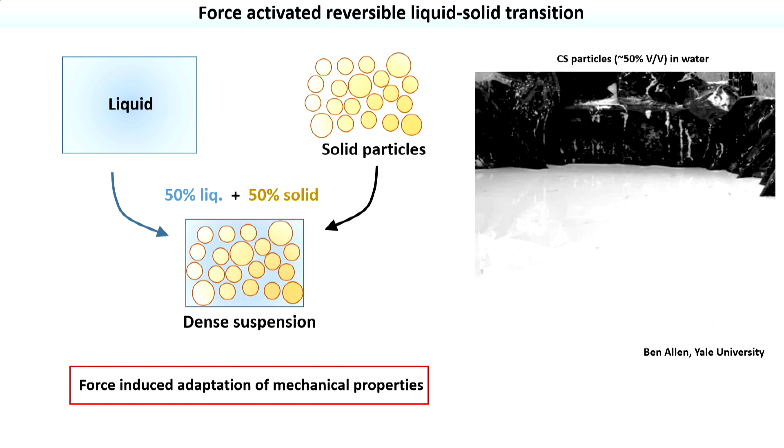Same principle allows one to run across a pool of cornstarch, as you can see in many YouTube videos.

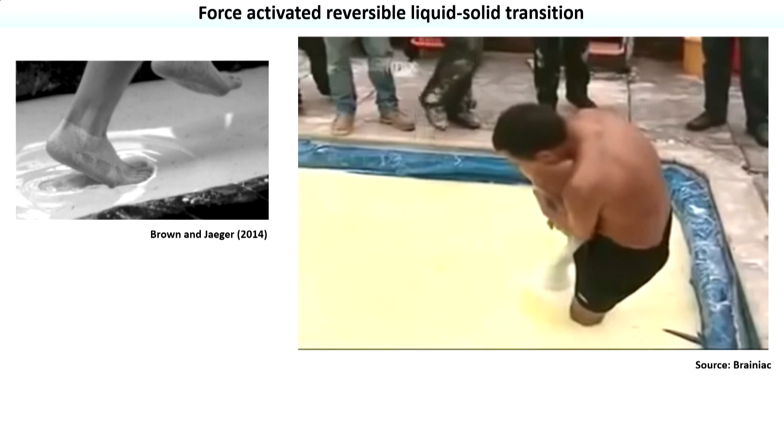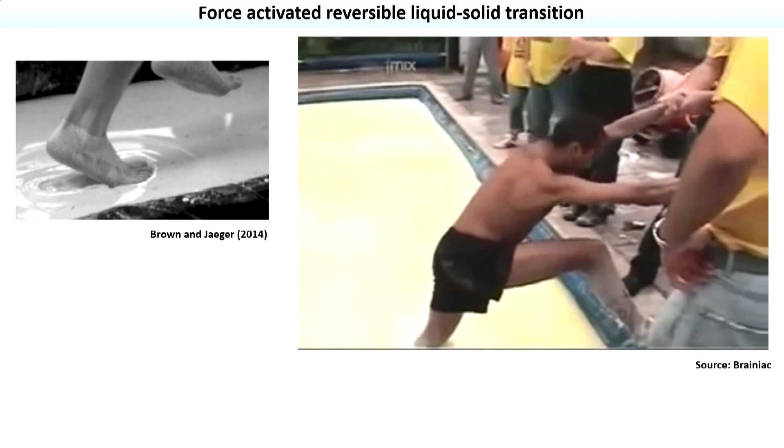This compressive force is not a requirement. At one time people thought it was the compression that solidifies the system. Actually, there is one interesting video where a guy got inside this pool of cornstarch. He has a difficult time getting out, which means it can resist the extensional force as well.

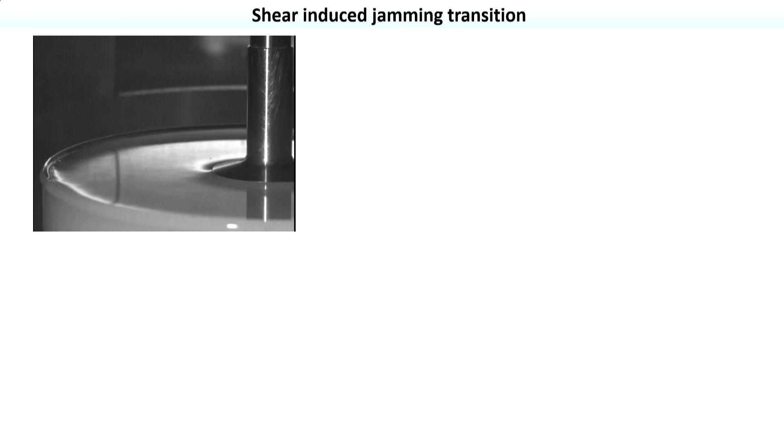So a few years back we studied this problem in a more systematic manner in the lab, like jamming under compression and jamming under extension, and we showed why this is so common and works for any kind of deformation, because this jamming is basically shear induced. As long as you have a velocity gradient inside the system, it can jam, and we demonstrated this more clearly.

You take a glass beaker, you keep a dense suspension, cornstarch and water for example, and you have an inner cylinder that can spin very fast. By spinning the cylinder you can create a velocity gradient without any compression or extension. The shear can actually solidify the system, and if you stop shearing, it goes back to the initial fluid-like state.

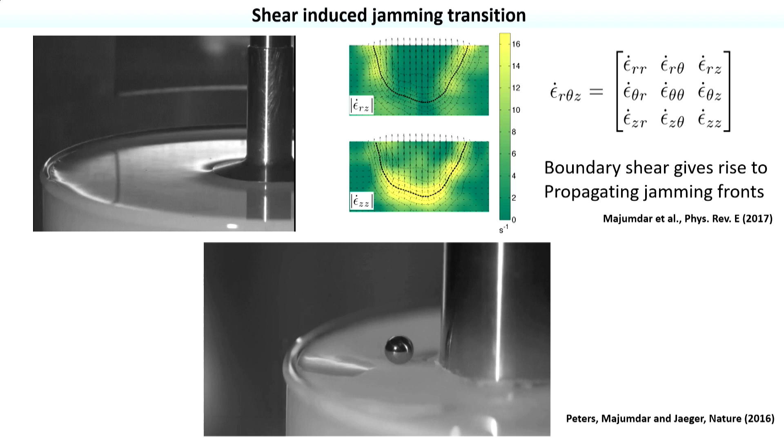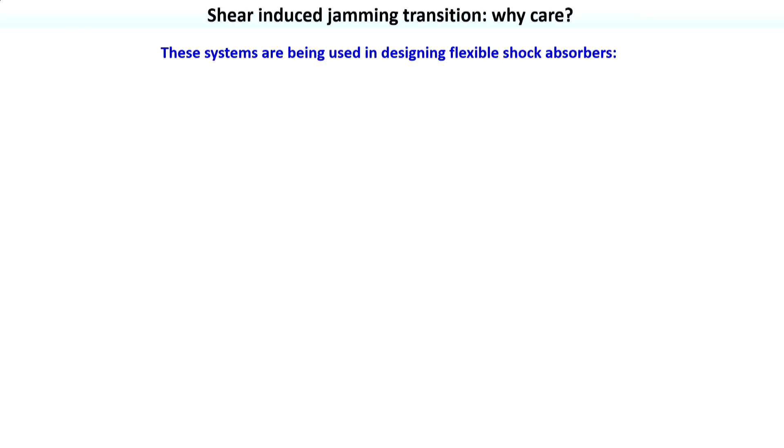Due to this interesting property, these materials are being used in designing flexible shock absorbers. Here are a few examples. You take this Kevlar fabric, which is the material used for making stab and bulletproof vests, and you treat it with dense suspension. It becomes very tough, and it cannot be punctured without compromising the flexibility.

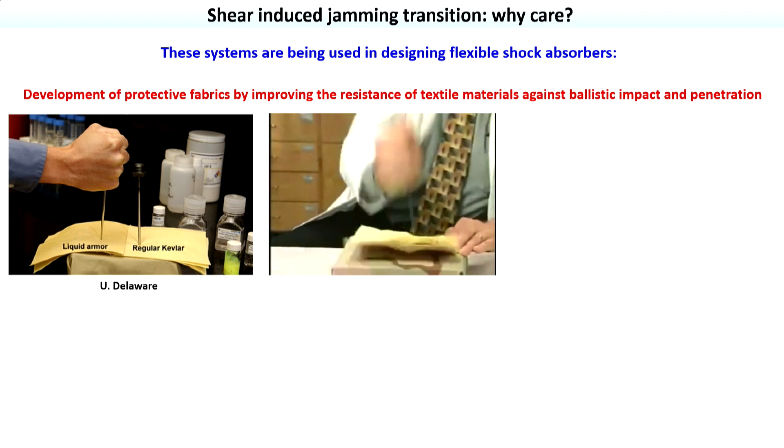That is important, because you can argue why not use a steel plate instead - but it won't be flexible. This can bounce off bullets, and you can also see it deflecting a hunting arrow, which is almost more powerful than a bullet probably.

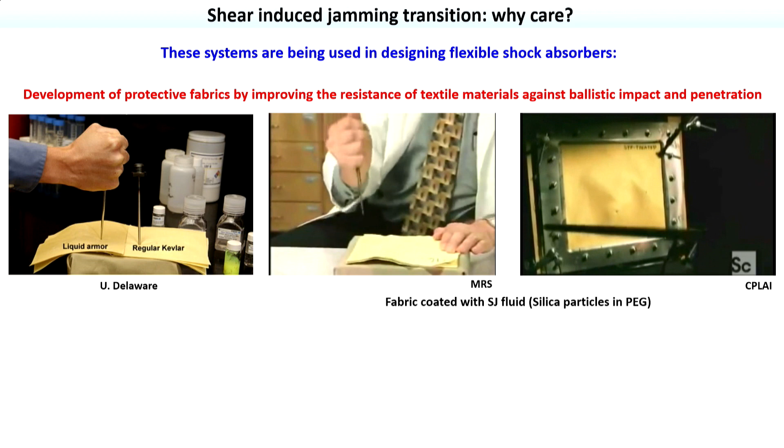There are other potential applications as summarized in this recent review, particularly in the field of designing flexible shock absorbers.

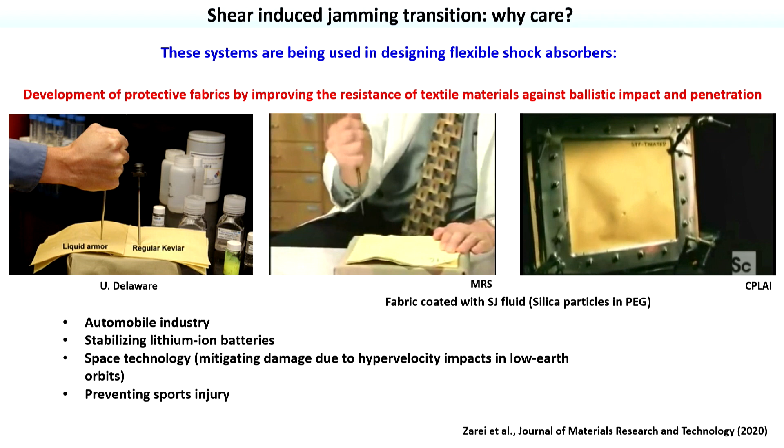So despite this study, there are many open questions. For example, the mechanism for shear-induced jamming is not well understood. Questions like what sets the upper limit of the stress response after perturbation, how quickly one can get to the jammed state, and once the jammed state is formed, how quickly it can relax.

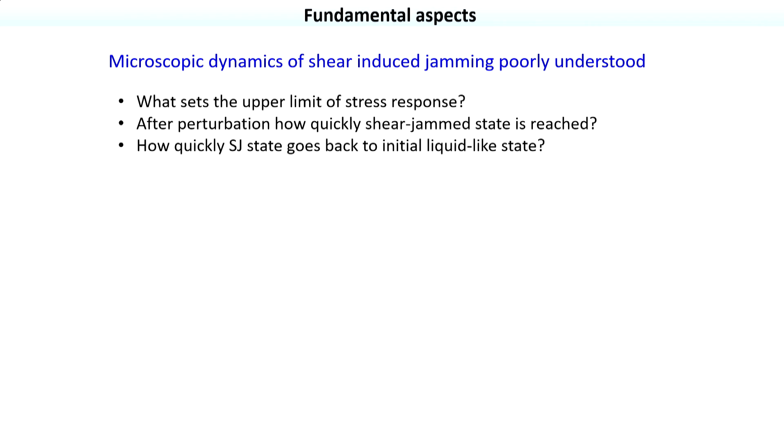If you realize, such questions are also very important from an application perspective, because if you want solidification required within a certain time scale, all these questions become very important.

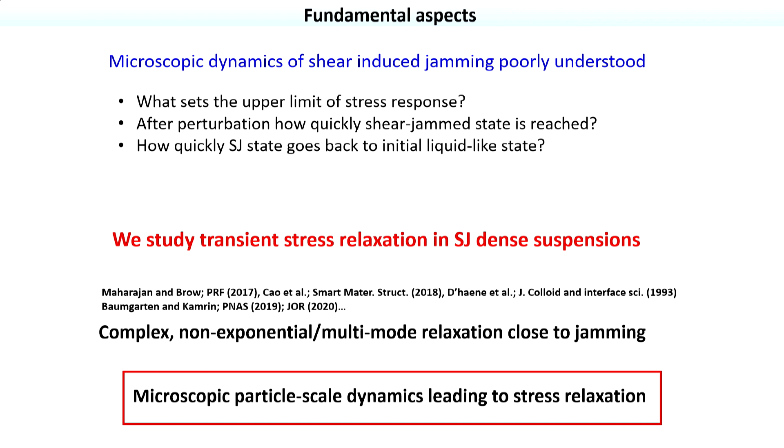So here I'll tell you about this shear-induced jamming under transient perturbation, relevant for the examples I've just given. I'll particularly focus on microscopic particle-scale dynamics that give this relaxation of the shear jammed state, which has not been explored before.

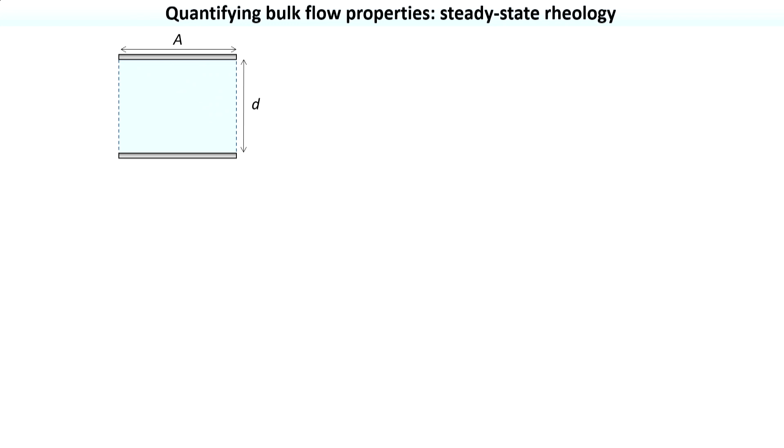So let me take a step back. How do we quantify such materials experimentally? We use a technique called rheology. You confine your system between two plates, and you apply some shear force on top of one of the plates.

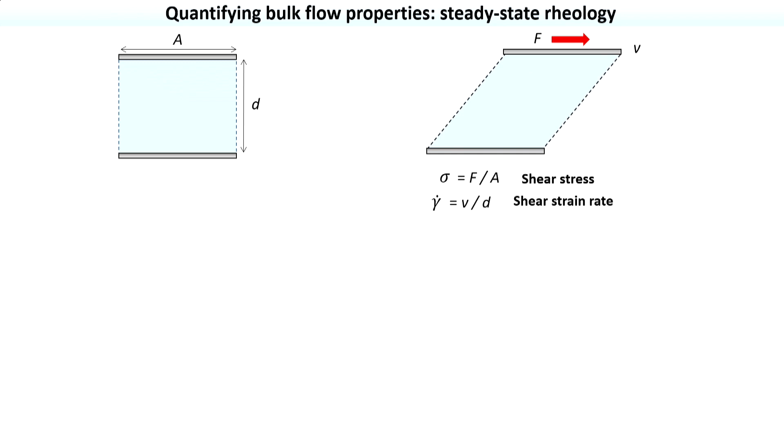In this case, it is the top plate. Now you can define two quantities: stress and shear rate. Stress is simply the shear force divided by area, and the shear rate is the steady state velocity produced as the material response, divided by the gap. Once you know this, the ratio is viscosity.

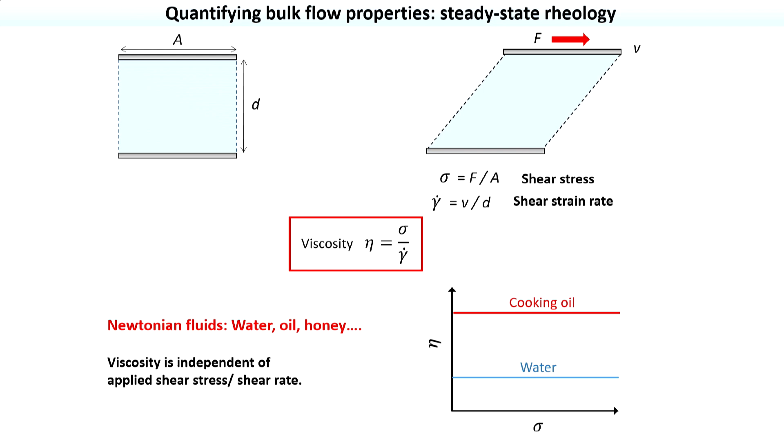Different materials like water, oil, honey have different viscosities. But one important thing is they are all Newtonian, meaning their viscosity is independent of how much force is applied to measure it.

Now coming back to dense suspension - it is quantified by the solid volume fraction. At very high volume fraction, typically approaching random close packing for hard-sphere systems - though with interactions it can go down - it becomes highly non-Newtonian, meaning the viscosity now becomes force dependent.

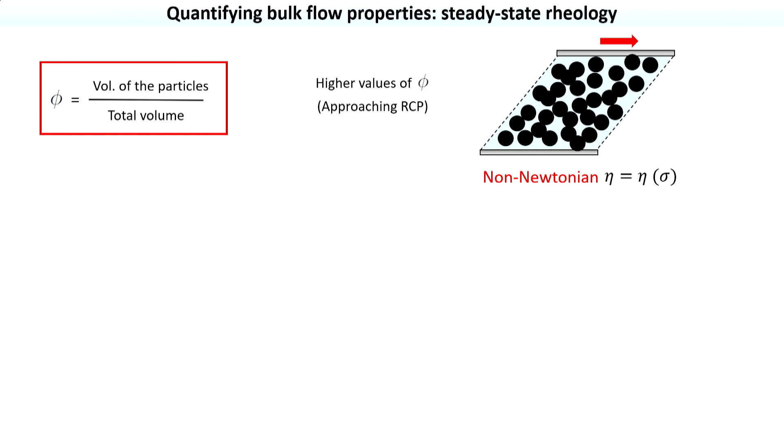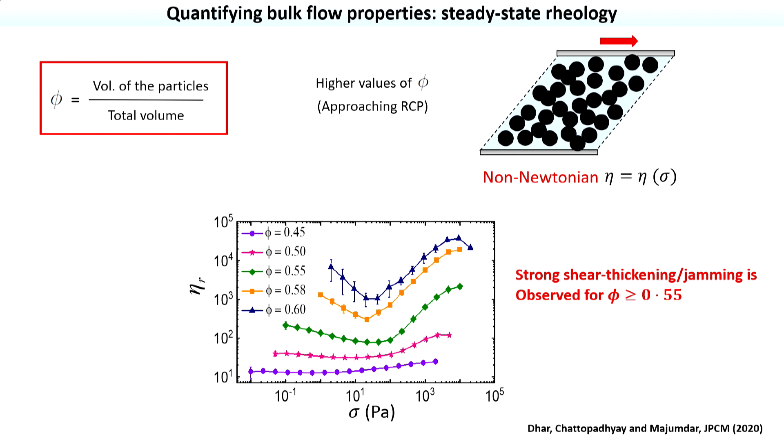Okay, so in the steady state, how do we understand such response? The reason is the following: this shear thickening or shear jamming system - these are well dispersed systems. You have high density of particles, but they are well dispersed. Now contact between individual particles at rest - those contacts are weak, and those are lubricated contacts.

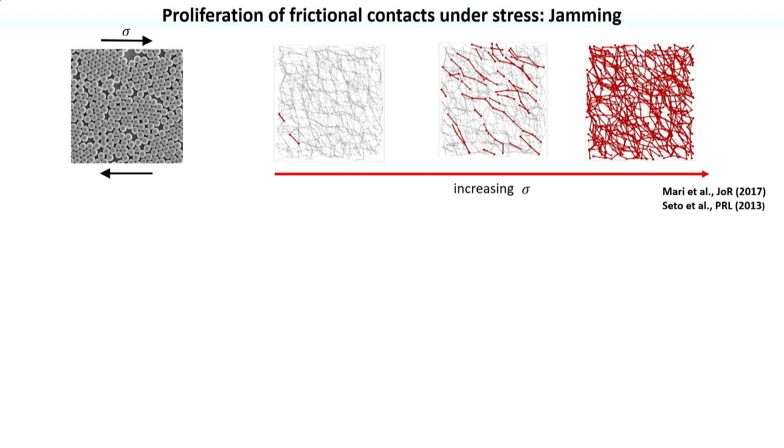Now as you increase the applied stress, shear stress for example, some of these lubricated contacts transform into frictional contacts, indicated by red. Finally, at high enough stress values, you have enough frictional contacts between the particles, so the average number of contacts is very high, and the viscosity can increase or it can go to even a solid-like state. This evolution of contact for a wide range of systems is given by a model proposed by Mike Cates and Matthieu Wyart.

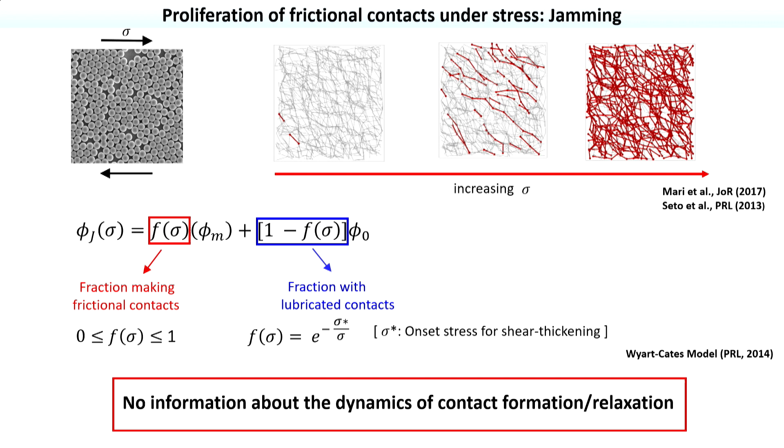It basically tells how the force is transforming, what fraction of contacts are transforming into frictional contact under force. However, one thing is there is no information about the dynamics of contact formation or relaxation. We know that if you have so many contacts, this will be the viscosity, but how the contact is formed or how the contact is relaxing - that is not there in the model.

So now what we study is a dense suspension of polystyrene particles dispersed in a non-evaporating solvent, that is polyethylene glycol. Since we require a large amount of particles, we synthesize these polystyrene particles, which are around 2.6 micron with a fairly small polydispersity, about 5%, in the lab by a technique called dispersion polymerization. So we make the dense suspension out of them.

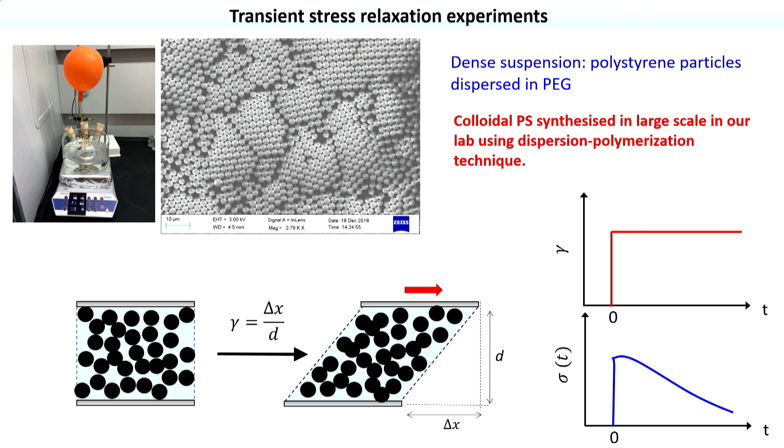Now what is the experiment? We again confine the system between two plates of a rheometer, and we apply a transient perturbation in the form of a step. We apply a step strain, and then we observe the stress relaxation in the system.

Similar functional form is observed in simulation for dense frictionless systems close to jamming in these papers, but their connections are not very clear, so this is what we have tried.

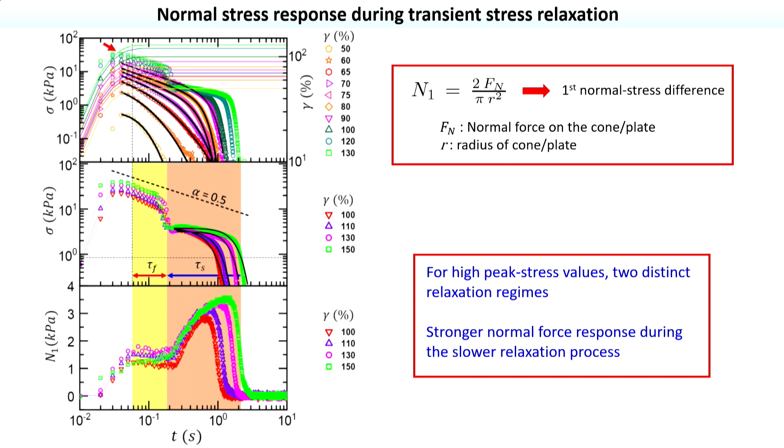But when the shear stress drops, you see a peak in the normal stress, a second peak developed. That's why this transient response is quite different from the steady state one, because in steady state the normal stress and shear stress for this system go hand in hand. As shear stress increases, normal stress also increases. Just to illustrate the difference, that transient response is quite different.

So now how do we understand further this complex relaxation process in the system? One property of this shear thickening dense granular system is, as I told you, the normal stress.

The normal stress in this case is generated because as you shear the system, you have to maintain some velocity gradient. That means different layers of particles have to go over each other. In that dynamic condition, there's an overall swelling of the pack. This is called frustrated dilation, and it's swelling not only in this direction, but in all directions.

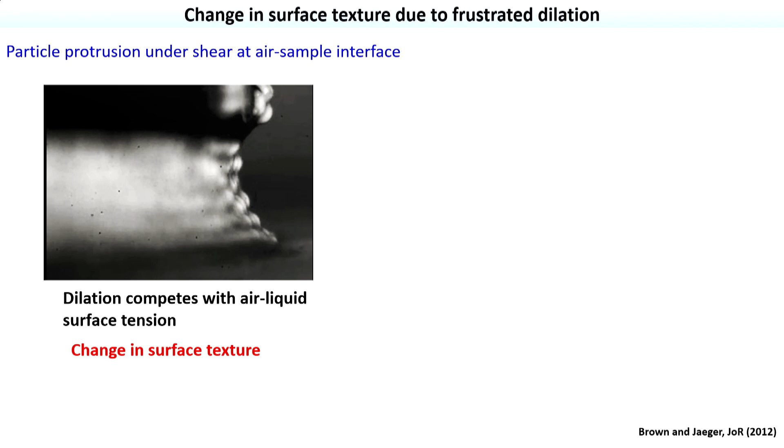These are granular systems, so the gap between the plates is about a millimeter, and the particles are fairly big, around 120 to 130 microns in diameter. This swelling or dilation competes with the air-liquid surface tension, and what it results in is a change in surface texture.

So this is one aspect, and there was an earlier study by Brown and Jaeger. They showed that for a wide variety of systems showing shear thickening and jamming, this surface tension provides a confining stress. Gamma is the surface tension and A is the diameter of the particle. They found that the maximum stress one can obtain by shear thickening is given by gamma divided by A, but not exactly that - there's a prefactor of 0.1.

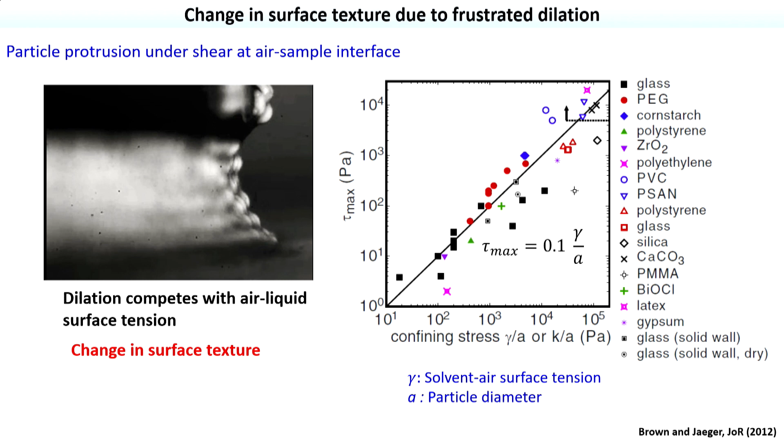Although the data is fairly scattered, you can see there's a rough trend in the data.

The sample is between two plates. Where is the air liquid interface? At the edge of the plate, just at the bottom. Yes.

So this is the actual experimental setup, a schematic of the actual setup. You have this top plate - actually it's a cone, for a reason I can tell you later - a cone with a very small angle, and there's a bottom plate.

We are using counter rotation, the plates rotate in opposite directions. These particles are opaque, so the suspension looks whitish. So what we do is illuminate the boundary and capture the image with a camera. This is the actual setup in the lab.

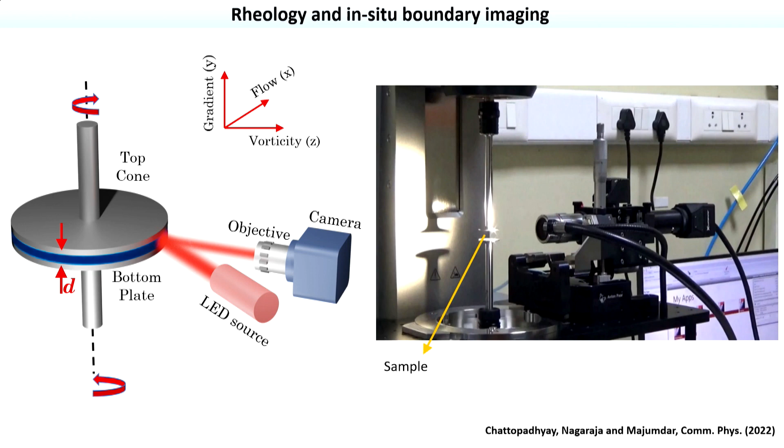These are the two plates. So you put the sample and bring down the plate to confine the sample. Because we are driven by the expectation that when this jamming happens, there will be some change in surface texture, that's why we have this kind of experimental setup.

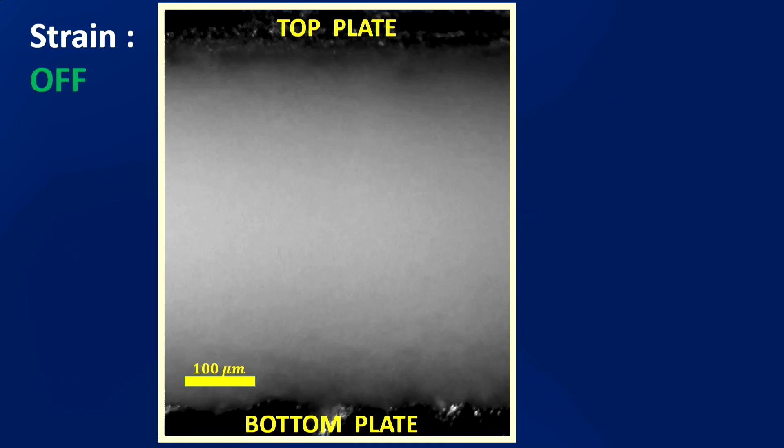So these white spots, we call them plastic centers, and this brightness that we are getting is due to dilation, which is relaxing also. Okay. So now why do we call the white spots plastic centers? Because what we found is that if you apply sufficiently high stress, these white spots merge, form a line, and eventually that creates a fracture.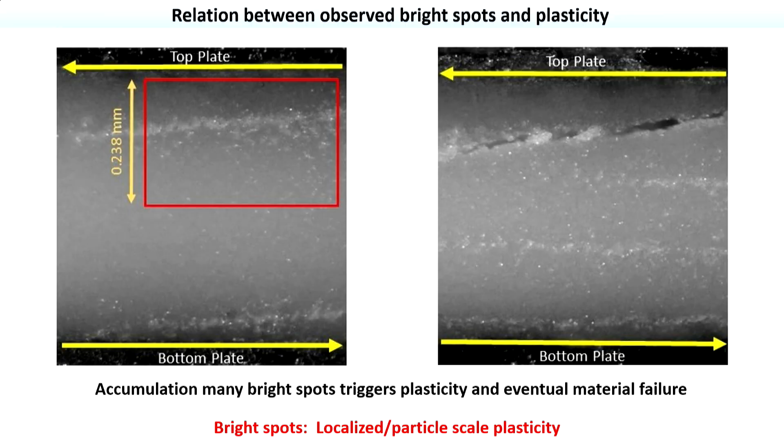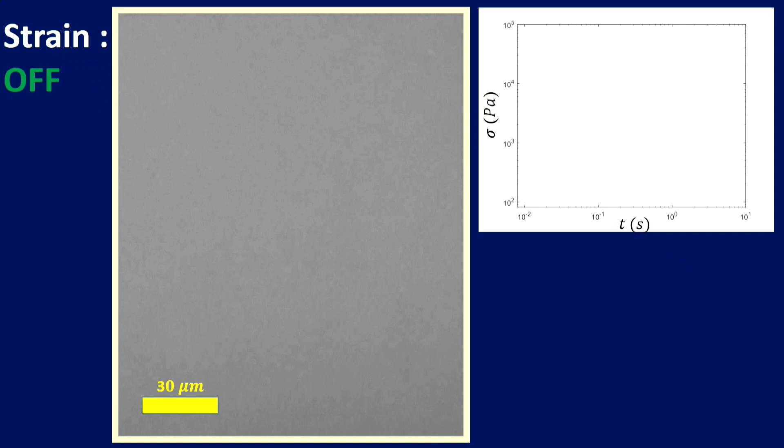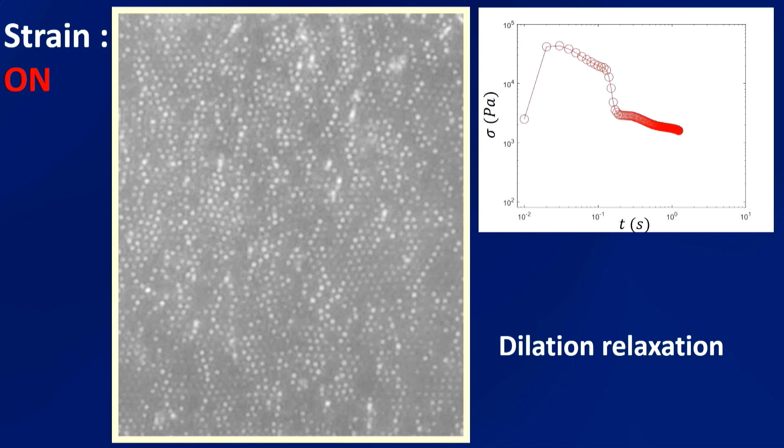Okay, so that means the individual ones might be small local plasticity. One problem is that we can see the particles, as will be clear in the next movie, only when they dilate out. After stress drops, the particle goes inside the bulk and it is difficult to see. So this is again the same movie but with a better resolution where you can see the individual particles. You can see these plastic centers near the peak stress, and the plastic center goes away after the first step. But for the other particles, it takes longer before the intensity drops to the initial value.

Okay. So now what we did, we tracked many such bright spots, for example one of these spots, and plotted their intensity as a function of time. And we also studied the intensity variation in another region which doesn't have a bright spot, where the brightness just increased due to dilation. For example, a region like this. So you see that where this bright spot is, the intensity relaxation shows a two-step behavior. There is a first step and a second step, whereas for the other region, it takes a single step, a single relaxation, and we define two time scales.

One is this tau p, the plastic center relaxation time, the first step, because I told you that after the first step the bright spots are gone. And the second relaxation is the dilation relaxation. We track many such spots and can get a distribution of times, and you can see there is a clear separation: plastic center relaxation happens over a much shorter time scale than the dilation relaxation time.

Okay. One more thing we did is based on the difference image, and what it tells us. Suppose you have an image of the boundary taken at a certain time, and then you take an image of the same region at a different time, delta t. The time difference between them is 16 milliseconds in this case. The idea is, if we subtract one image from the other and the images are different, then you get some intensity in the difference image. That means some rearrangement has happened. Suppose the image is completely static, then if you subtract the same image from it, you get zero intensity, because you are subtracting the same thing.

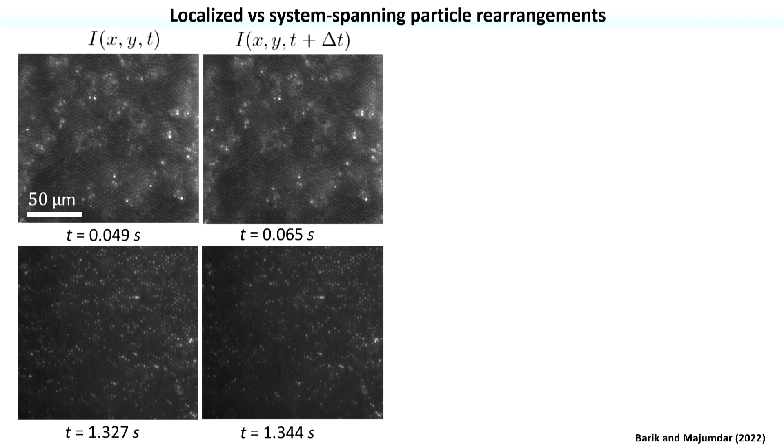Okay, so we do the same thing with almost similar time separation, but during dilation, this absolute time is a little larger, meaning it is beyond the first step. So we calculate the difference image. These are the images. You see that during the plastic center relaxation, the difference image shows very localized rearrangements, as shown by these bright spots. There are some small rearrangements happening, but these stand out. Whereas during dilation relaxation, for almost the same delta t, you get a system-spanning relaxation, because everywhere the difference image is showing bright spots. Okay, so everywhere the reorganization is happening.

Okay, so now we compare these time scales with those obtained from the rheological measurement. Remember, I indicated the fast and slow time scales based on the stress relaxation data, and we also defined time scales for plastic center relaxation and dilation relaxation. For a wide range of volume fractions showing shear thickening and jamming, the fast relaxation obtained from stress relaxation in bulk rheology matches exactly with the plastic center relaxation, whereas the slow relaxation time matches well with the dilation relaxation time. So we get very good agreement between the two. This indicates that fast relaxation is due to localized plastic center relaxation, and slow relaxation is due to system-spanning dilation.

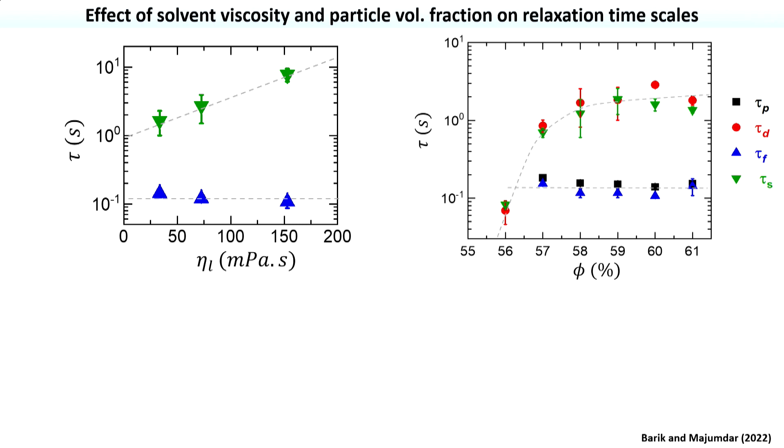To verify this further, we also changed the solvent viscosity. We use the same volume fraction, but with PEG, a short chain polymer. Depending on the molecular weight of the polymer, you can increase or decrease the viscosity. So you see that this fast time scale is independent of solvent viscosity, whatever variation we could achieve. Whereas for dilation relaxation, with increasing solvent viscosity, the slow relaxation time increases. Together with the last plot that I showed, we concluded that the slow relaxation time increases with increasing solvent viscosity and particle volume fraction, whereas the fast relaxation time is pretty much independent.

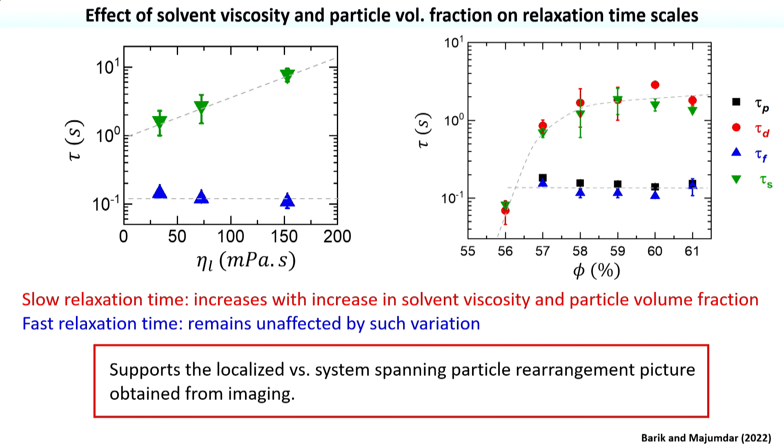So it supports the fact that plastic center relaxation is coming from localized events, where this average property like change in viscosity or average number of contacts doesn't matter much. Whereas the slow relaxation time depends on system spanning events, so it will be sensitive to change in viscosity or average number of contacts, because this fast relaxation time is more sensitive to local environment.

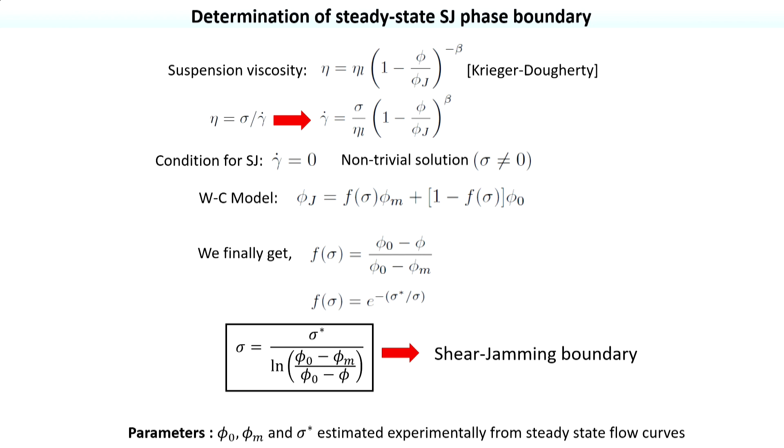One trivial solution is sigma equal to 0, because if you don't do anything to the system, nothing will happen. But the non-trivial solution gives phi equal to phi j, and using the Wyart-Cates model again, that is given by this fraction of frictional contact, f of sigma, for a given stress sigma. So we can get a relation between stress sigma and the volume fraction, beyond which the system will jam, and all these parameters we estimated from experiments using steady state flow curves. So this is the shear jamming boundary.

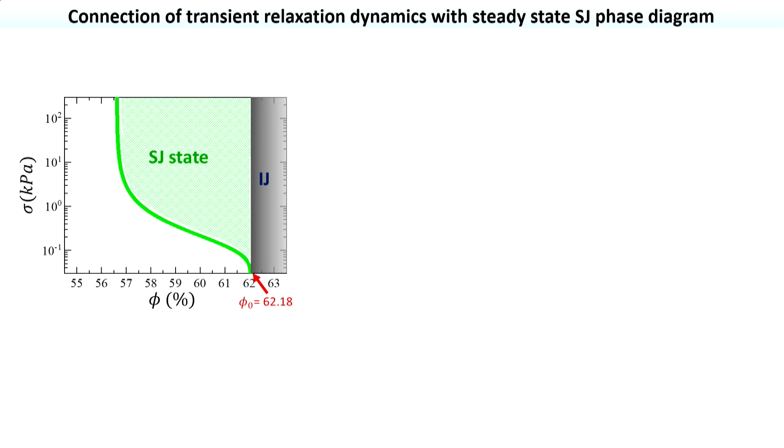So for very high volume fraction you have isotropic jamming. That means your volume fraction is so high that the system is solid anyway, you've put in so much particle. This region is not accessible for experiment. Now this shear jamming is telling us that at low stress you can start from a liquid-like state, but if you increase the stress it will enter a solid-like state that we are interested in. This is the boundary, telling us that if you are below 56% you can never hit the shear jamming transition. Now on the steady state shear jamming diagram, we just superpose the nature of relaxation that we reported.

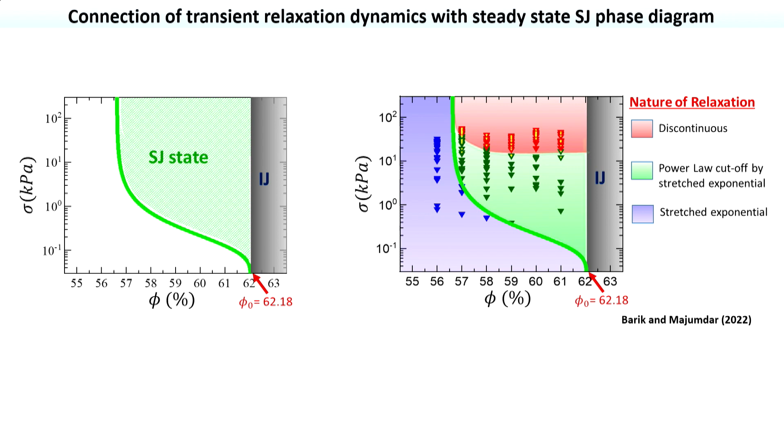We didn't expect any connection between these two, but looks like something is there. Inside this shear jamming boundary, this green region, we get the form I showed you—power law cut off by stretched or compressed exponential. So that is this green region. Now if you go to higher value of stress, in the red region you get two-step relaxation, and you see plastic center in this region, because in the green region if your stress is not so high you don't see any plastic center. And interestingly, below this shear jamming boundary, we found that you can fit the data fairly well just with a stretched exponential function. The functional form completely changes. So this is interesting—we don't know yet what the basis of this difference is.

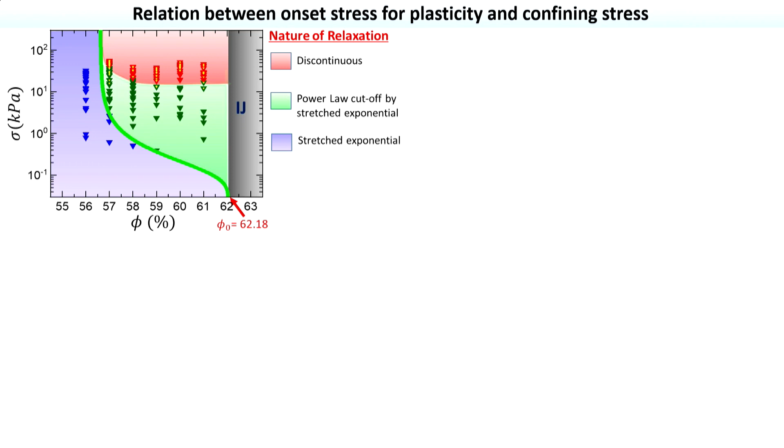So the last thing I wanted to tell you is, for a wide range of volume fraction, we found that this top boundary—beyond which two-step relaxation and plasticity come in—is fairly flat, and the stress scale is given, in our case about 16 kilopascal, except for the fact that for lower values of phi, but still inside the shear jamming region, there is some deviation. But apart from that, in this region it is fairly flat, and you get 16 kilopascal. Interestingly, this 16 kilopascal can be obtained from the ratio of the PEG-air surface tension, which is 40 millinewton per meter, and particle diameter in our case is 2.6 micron. The ratio of these two gives you this stress value.

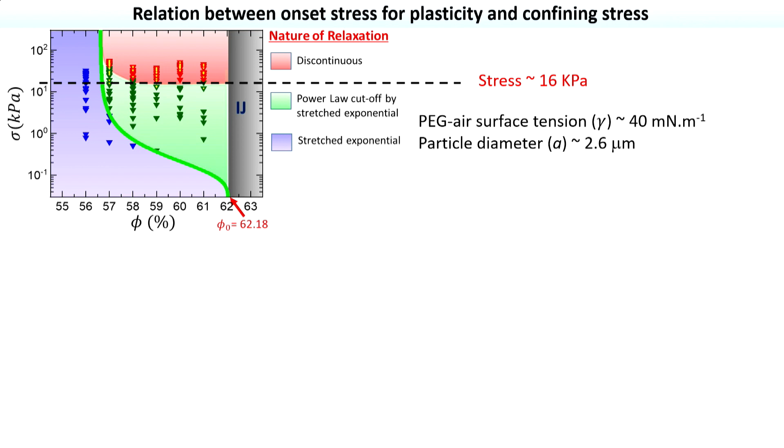So now it looks like there is some connection with the confining stress, which is not unreasonable, because you can imagine what a plastic center is, how we see it. What we found is that these bright spots are excess protrusion. In these regions the particles protrude out more, so they scatter more light. Now imagine you have very little modulation of the interface. On this side you have suspension, the other side you have air. So imagine you have very little modulation, but near a plastic center, since the particle protrudes out significantly, you have a

very, very sharp curvature, where the radius of curvature is of the order of a, the particle size. Then the stress you get is at least this much stress inside your system, and that's why the particle is pushed out so much. Whereas remember the steady state case I showed you, they found that the peak stress is given by this 0.1 times gamma over a, because in steady state you expect much less modulation of the interface.

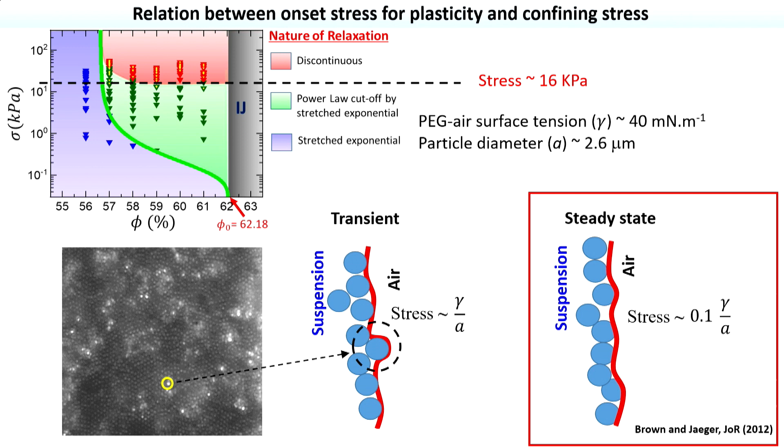Why? Because if you have plasticity, that is one advantage of transient measurement. If you develop plasticity and keep on shearing, eventually your system will fracture. So that high stress scale is not possible to access using steady state rheology, only transient rheology. So this is something new, we are still thinking about it, but we used smaller size particles and we found that this peak stress scale indeed goes up, so we are probably on the right path, but more work needs to be done. So now I'd like to conclude.

We showed that there are two distinct transient stress relaxation regimes in shear jammed dense suspensions. Using in situ boundary imaging, we showed that localized plasticity gives rise to fast relaxation, whereas system spanning dilation results in slow relaxation in the system. We have also indirectly confirmed such a mechanism by changing the solvent viscosity and so on. And there is some interesting correlation between transient relaxation and the steady state shear jamming flow curve. So we'd like to understand better why there is a correlation with this boundary that is predicted from steady state rheology basically. I didn't show anything, but if anyone is interested, I can discuss.

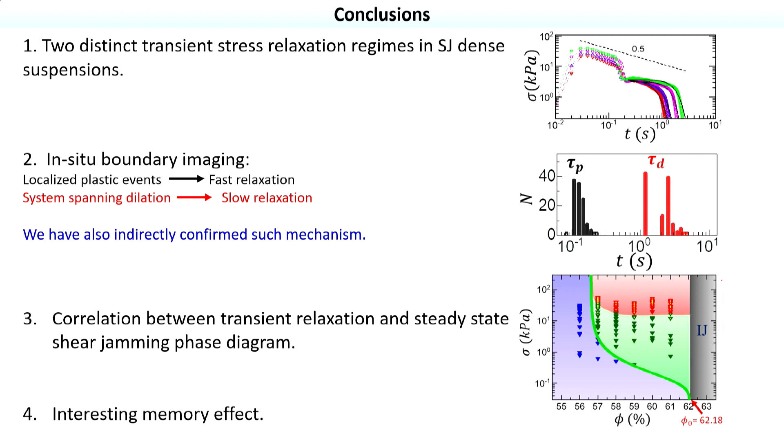We are finishing up an experiment on a very interesting memory effect in the system. We study memory effects in glassy systems, because out of equilibrium systems typically show memories, because an equilibrium state doesn't have any memory of how equilibrium was reached. However, in this system we found that you apply some force and then it relaxes, the stress is completely relaxed as the system goes back to a liquid-like state. And we'd like to think that a liquid-like state will not have any memory. Whatever you did is erased because it has reached some liquid-like state. But apparently it is not. If you load the system again and again, it can show some interesting trend, which is very non-intuitive, I would say. And we also confirmed this by imaging and so on.

So now these are the future directions. One question is, what is the nature of this plasticity? In our case, we define plasticity, like I told you, as these bright spots that eventually lead to fractures. So we are kind of concluding backward that maybe these individual ones are localized plasticity. This is not a formal way to define plasticity. For plasticity in glasses, you have to calculate the mean squared displacement and look for larger mean squared displacement. But unfortunately, we cannot see the particles for a longer time. Probably one can index match and do some confocal imaging to get a better understanding.

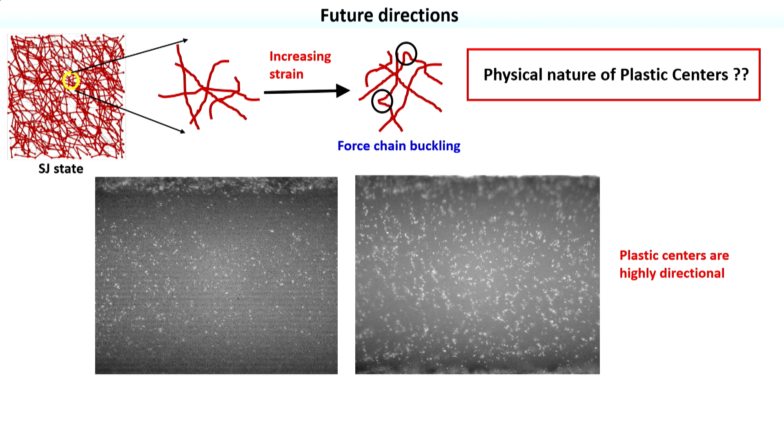Now I told you that I am applying the first step and we are going in the same direction, and you are creating more plasticity. What happens after the first step you create plasticity, and if you go back, that is the second case, you see that you have a lot of plasticity after the first step. Now if we go back, immediately you see that if you go in the other direction, the plasticity is gone. So this is highly directional.

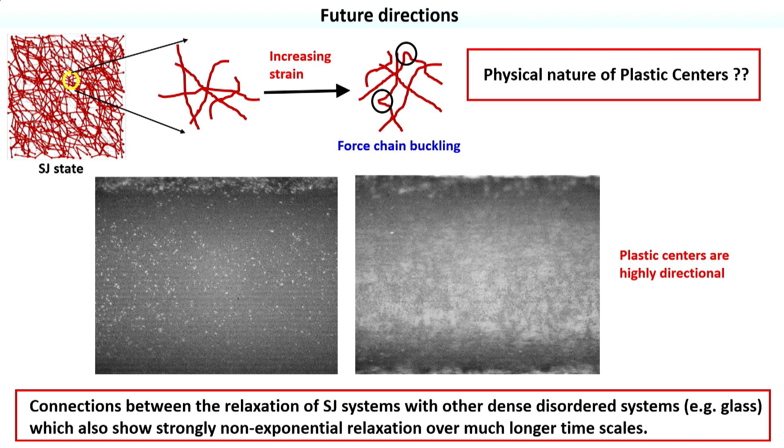Another important point we need to address, which is more of a long-term thing, is the connection between the relaxation of the shear jam system and other dense disordered systems like glassy systems, where we also get strongly non-exponential and two-step relaxation. All these things are there, but for glasses it happens typically over a much larger time scale. Often the relaxation is not complete, whereas for the shear jam system it is happening over a time scale of seconds. So although both are dense and disordered systems, and they show some overall similarity in terms of non-exponential relaxation, why this difference in time scale comes about is very surprising to us.

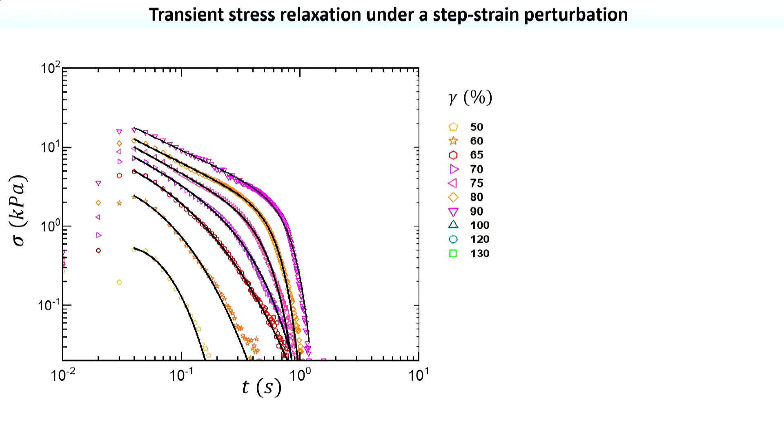That's a good point, but that is not really true, because you have to remember that the x-axis is log scale. You are right that the time origin is not the same. So see here, what is the time here? It is roughly 0.2 second. And for example, I take this longest relaxation, which is 2 seconds. So 2 minus 0.2 is very large, whereas for this first step, the total time is less than 0.1 second actually. 2 minus 0.2 versus 0.1.

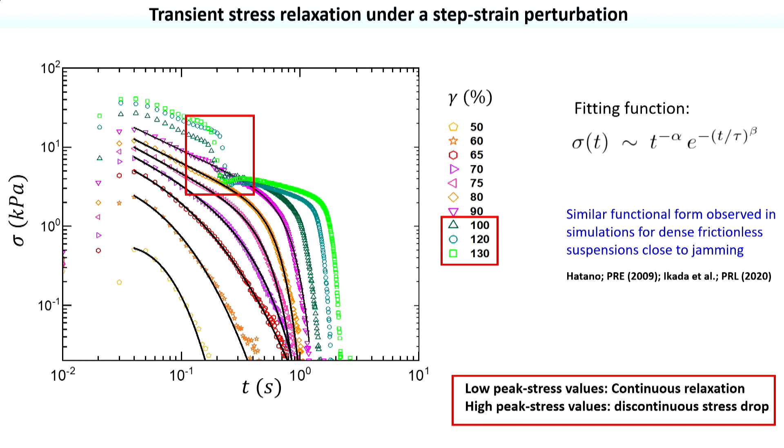Yeah, but you showed an image mapping, right? You go a couple of images back maybe. There was a comparison between a short time and a long time. Yes, here also it is the same. See here, you are confused because this axis is log scale. So if I take the difference from, let's say, here to here, this is again 1 or 2 seconds minus 0.1 second, which is negligible. It is like 1.9 seconds or 0.9 second, versus this first step, where everything is happening over 0.1 second. You are correct if this is a linear scale.

No, I understand. I'm not saying it is additive linearly. I'm saying it is coupling altogether, because when it is coupling, it is localized for a short time and you are checking again at the time scale. But then as a total it is system spanning, because the time origin is not followed. The delta t was the same, but the phenomenon was different. For the short initial time when you are checking, it is localized.

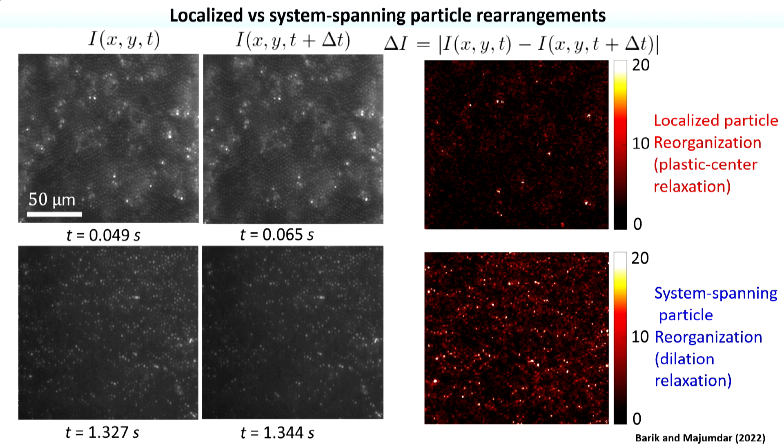But the delta t is same, right? So the time delta t origin is same. What matters here is the initial time. That's what I'm saying - what matters is the initial time, what is your initial time, yeah, that's what I meant.

That is the whole point actually, because this is whether you are in dilation relaxation regime or plastic center relaxation. It was also coupled to the last point you made, maybe the transient state and the steady state. So when you are starting the process, it will directly affect which state you are in. You might miss the localized part. Yes, so that is your second point.

That's a good one, because the steady state is very close to that slow relaxation process. Yeah, the fast one - that is the definition of steady state, right? You look at the time scale where all the initial things have settled down in the system. So typically that is a much slower time scale, and that slow time scale becomes correlated with those processes. That is true, yes, thanks.

There might be time for only a very short question, maybe.

I don't know if you explained - I didn't understand - why the normal stress increases when the... I mean, I don't know if you explained that.

Yes, so actually, you have a dense system with all these particles. Now when you shear it, you have different velocity as you go down, right, because that is the velocity gradient. That means the next layer is going faster than this layer, because that's why you're having the gradient. Now to do that, the next layer particle has to move over the bottom layer particle, because they are not point particles, they are finite size, so they have to climb up and jump like this.